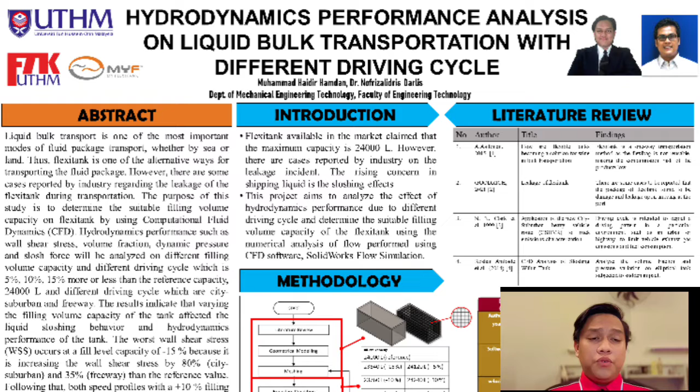Firstly, we go to the abstract. Liquid bulk transport is one of the most important modes of fluid package transport, whether by sea or land. Thus, flexi tank is one of the alternative ways for transporting the fluid package. However, there are cases reported by industry regarding the leakage of the flexi tank during transportation. The purpose of this study is to determine the suitable filling volume capacity on flexi tank by using computational fluid dynamics (CFD).

Hydrodynamics performance such as wall shear stress, volume fraction, sloshing forces and dynamic pressure will be analysed on different filling volume capacity, which is 5%, 10%, 15% more or less from the reference capacity, about 24,000 litres, and different driving cycles which are city suburban and freeway driving cycle. The results indicate that varying the filling volume capacity of the tank affected the liquid sloshing behavior and hydrodynamics performance of the tank.

The worst wall shear stress occurs at the filling volume capacity of minus 15%, as it is increasing the shear stress by 80% at city suburban and 35% at freeway compared to its reference value. Following that, both speed profiles have their best dynamic pressure at the filling volume capacity of plus 10%, as it is reducing the dynamic pressure by 60% at city suburban and 47% at freeway from its reference value. Thus, it is recommended that the filling volume of plus 10% is suitable for the flexi tank. Hence, this study benefits liquid bulk transportation by increasing filling volume capacity and optimizing hydrodynamics performance.

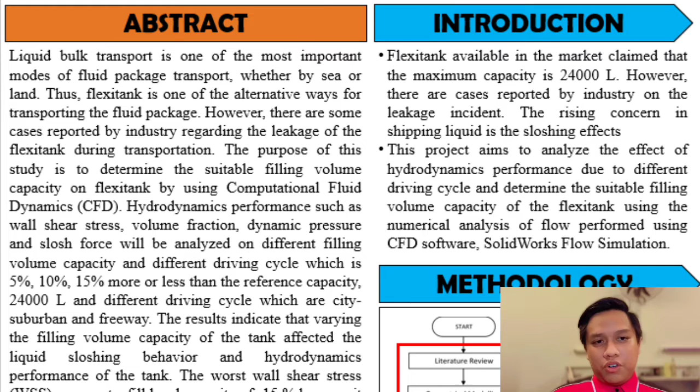Next, we move to the literature review. Firstly, A. Aaltonen, 2015, in his study on how flexible tanks are becoming a solution for wine-in-bulk transportation, states that flexi tank is a one-way transportation method as the flexibag is not reusable, making the contamination risk of the products low. These findings show why industry players prefer to use flexi tanks as their method of transporting the fluid package. Next, Goodrich stated there are some cases reported where flexi tank packages were found damaged and leaking upon arriving at the port. These findings show that the possibility of flexi tanks leaking during transportation exists.

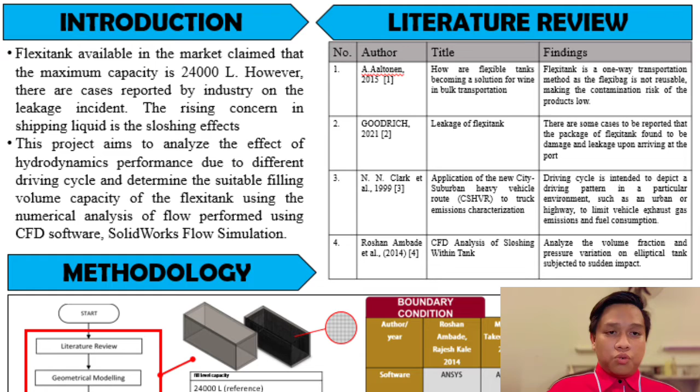Next, N. Clark et al., 1999, state that a driving cycle is intended to depict a driving pattern in a particular environment, such as urban or highway, to limit vehicle exhaust gas emissions and fuel consumption. Therefore, in this study, driving cycles of city suburban and freeway were used to analyze the hydrodynamics performance. Lastly, Roshan Ambade et al., 2014, in their study on CFD analysis of sloshing within a tank, analyzed the volume fractions and pressure variation on an elliptical tank subjected to sudden impact. These findings show that previous research mostly used CFD to analyze hydrodynamics performance. Therefore, in this study, CFD will be used to analyze the hydrodynamics performance on the flexi tanks.

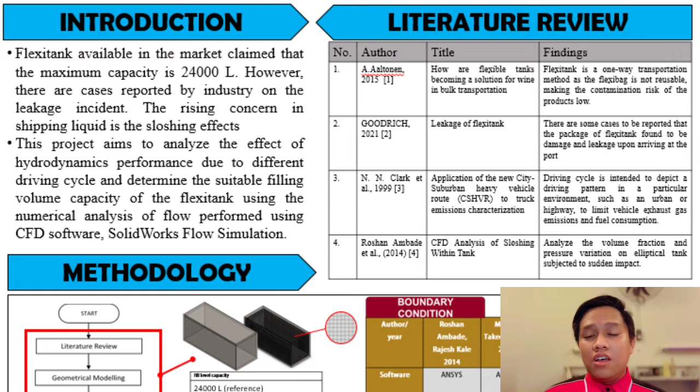Next, we continue with the methodology. From previous studies, there are variations of software being used, such as ANSYS SPH graphic simulations. For this study, the simulation used to analyze the hydrodynamics performance is SolidWorks Flow Simulation. For the velocity and capacity, there are also differences between the researchers, as they comply with their objectives. And for the type of flow, most of the researchers use transient state to study hydrodynamics performance. Hence, this study also uses transient state.

Next, for the geometrical modeling, in this study it was developed using the CAD software SolidWorks 2019. Next, for the meshing, it was done at the fluid domain and the internal walls of the flexi tank. Next is the boundary conditions. The speed profile is based on 2 driving cycles, which are city suburban and freeway. And for the reference, the table shows the variety of the filling volume capacity.

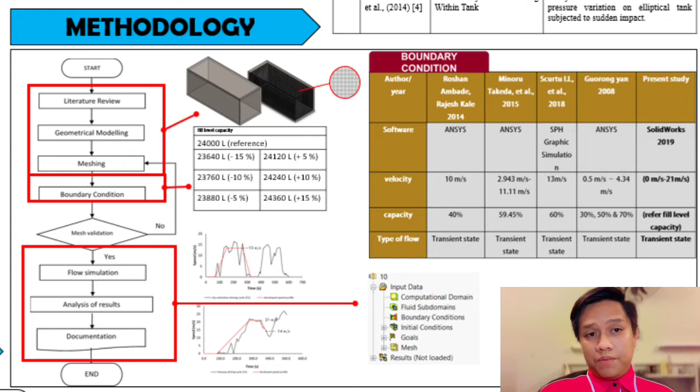And for the mesh validation, in this study it was carried out from the first level of refinement until the best level, and the best level of refinement achieved is at the 3rd level. Next, after the mesh quality validation was achieved, the flow simulation proceeded, then the results were analyzed, and lastly, the documentation.

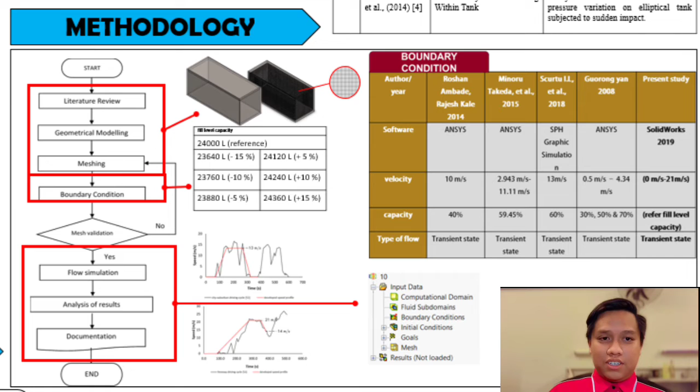Next, we move to the results and discussions. For the volume fractions, it shows that the liquid moves in the opposite direction of the flexi tank movement direction. During sloshing, the liquid hits the back, front, and the top of the flexi tank walls. This shows that there is a possibility of leakage happening. And if we look at t equal to 0 seconds, 100 seconds, and 300 seconds, the liquid sloshing behavior for both driving cycles is nearly the same.

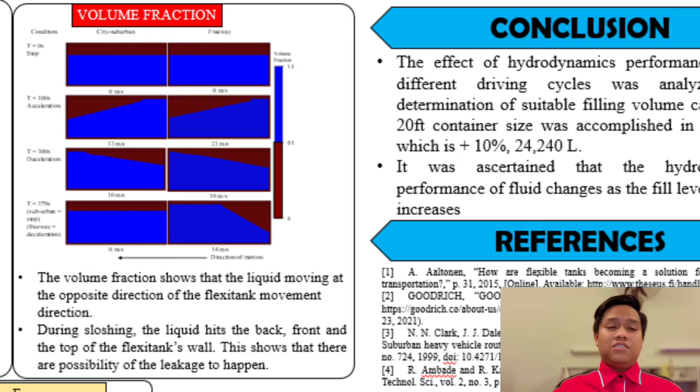But at t equal to 379 seconds, there is a slight difference. For the city suburban, the liquid is in a steady state as it is fully stopped based on the driving cycle conditions. And for freeway, it is not in steady state and still sloshing as it is not fully stopped. Parameters like wall shear stress may contribute to the leakage of the flexi tank.

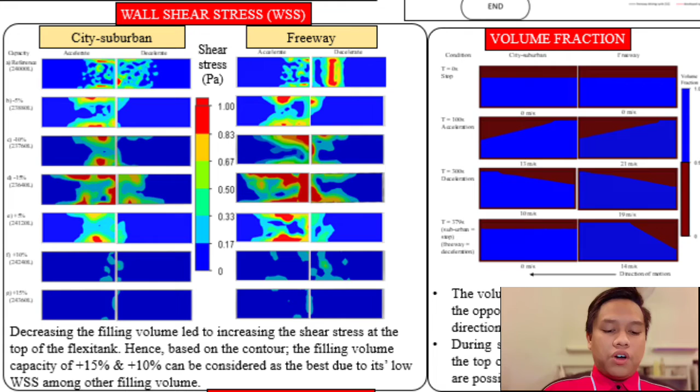While for the freeway, the figure also shows that the highest stress occurred at the fill level of minus 15%, where the value of its wall shear stress is 0.1585 Pascals, which is 35% worse than the reference filling volume shear stress, which is 0.1177 Pascals. It shows that the shear stress increases when the filling volume decreases due to the rigidity of the liquid in the flexi tank.

For the dynamic pressure, the graph shows the dynamic pressure variations of different filling volume capacities over time. The filling volume capacity of minus 10% has the highest dynamic pressure among other filling volume capacities from the graph. The average dynamic pressure for the filling volume capacity of minus 10% along the 379 seconds is 2,830 Pascals for city suburban and 2,554 Pascals for freeway.

The reference capacity of 24,000 liters has an average dynamic pressure value of 840 Pascals for city suburban and 1,175 Pascals for the freeway. As the reference capacity has leakage issues, the filling volume capacity of minus 10% can be considered as rejected, as those values of pressure raise the risk of a leakage incident.

The graph shows the filling volume capacity of plus 10% has the lowest dynamic pressure for both driving cycle conditions. City suburban average dynamic pressure is 333 Pascals, while for the freeway dynamic pressure is 625 Pascals. These values are 60% and 47% respectively better than the reference values. Hence, this analysis shows that filling volume capacity of plus 10% is the best as it is sloshing with the lowest dynamic pressure.

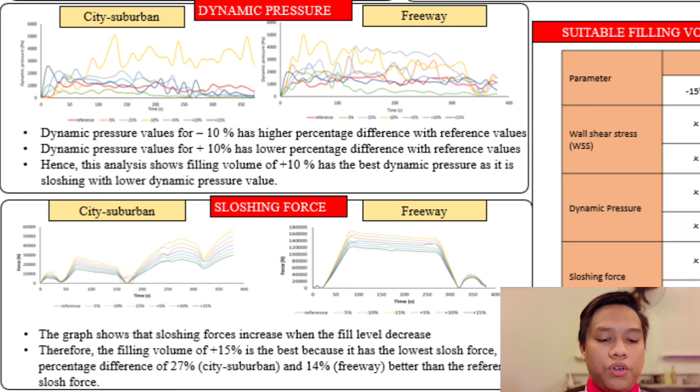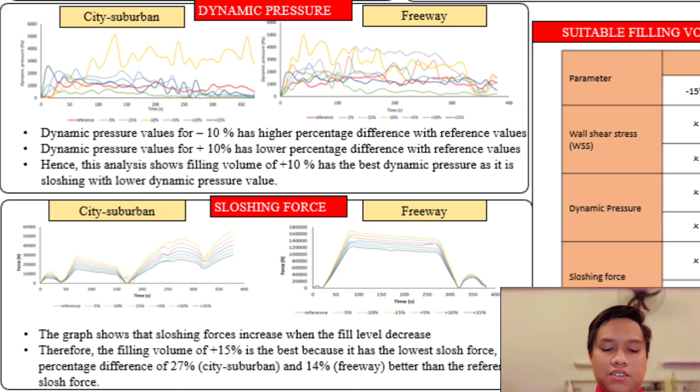However, for the graph of the freeway, the slosh force is higher during acceleration at the range of 0 seconds to 276 seconds, which is 106,526 newtons, than the slosh force during deceleration, which is 19,284 newtons, that can be observed at the plotted graph, range at 344.6 seconds until 379 seconds. This is affected by the motion experienced by the flexi tank, which is the city suburban and freeway driving cycle.

Based on the driving cycle, motion at the city suburban from 0 seconds to 379 seconds needed the flexi tank to experience motion from 0 meters per second to 13 meters per second in 81.1 seconds and 13 meters per second to 0 meters per second in 58 seconds. Besides, for the motion at the freeway driving cycle, the flexi tank experienced acceleration from 0 meters per second to 21 meters per second in 196.5 seconds duration time. Then it decelerates from 21 meters per second to 14 meters per second in

34.4 seconds duration time. Hence, the filling volume capacity of plus 15% is the best because it has the lowest slosh force, with percentage difference of 27% for city suburban and 14% for freeway, better than the reference slosh force.

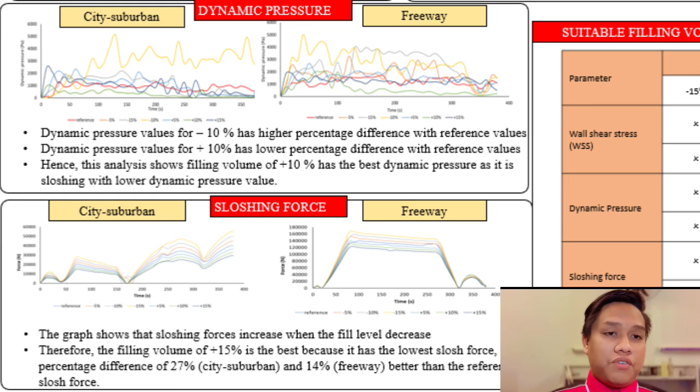Lastly, for the suitable filling volume, after considering the hydrodynamics performance analysis in this study, the suitable filling volume can be determined. The determination made is shown in the table. After taking into account the percentage difference of all parameters for each filling volume capacity, it can be considered that the suitable filling volume for flexi tank is plus 10%, as its percentage differences indicate that it is better than the reference values of all the parameters.

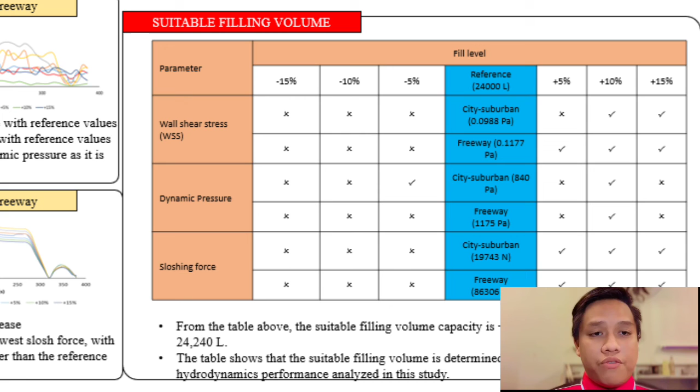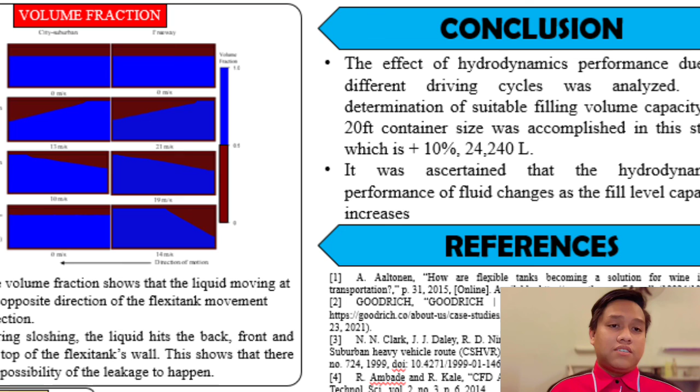And as the conclusions, the effect of hydrodynamics performance due to different driving cycles was analyzed. The determination of suitable filling volume capacity on 20 feet container size was accomplished in this study, which is plus 10%, equivalent to 24,240 liters. It was ascertained that the hydrodynamics performance of fluid changes as the filling volume capacity increases.